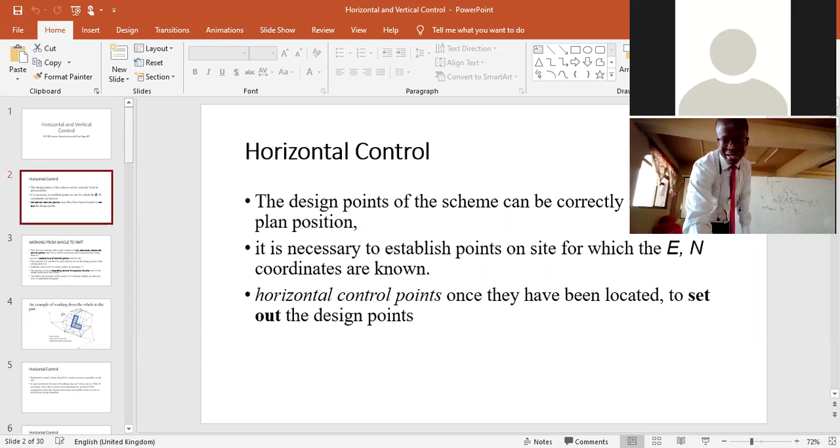So how do I go and set it out? I will need to first know that you need to turn this one, go a certain direction, measure a certain distance, and that is the point, this is where our first column is going to be. This is practically how it works. So it's very important to establish control points on the site, and then extend the control. Literally, if these are sites, we need to know these coordinates on the ground and set them out.

How do we set the coordinates out? It's like saying, find these coordinates. Find the coordinate for the corner of this structure. How do you do that? It's not trivial, so let's make the class interactive. How do you find the coordinates?

You're an engineer, right? Your design is being done on an existing scheme, like a plan. So you have a scheme on a plan, an existing plan. What do you need to find your coordinates? What do you need? So if I have these, I want to set it out.

I've explained to you that the project is sitting on the horizontal. I've never seen a building that looks like this before. But if you're being real, as you drive along and see the slope sides, you think, wow, if the building were like this, it would have been a bit easier, because now you have to step, isn't it?

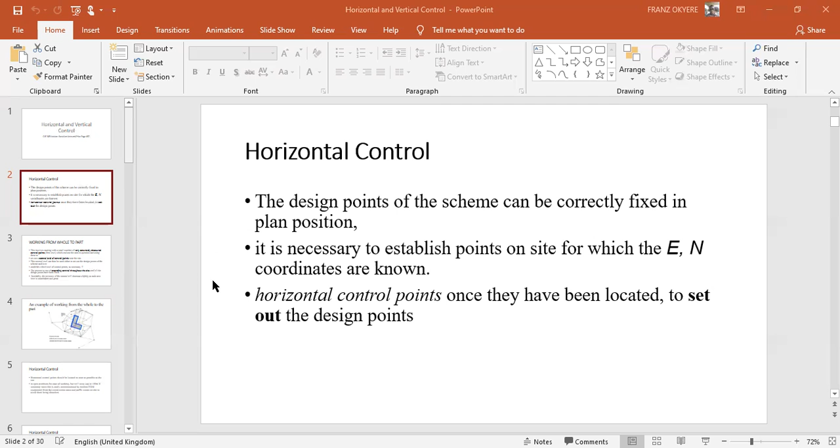Okay, so basically we need to have these controls. Okay? Yeah. So there can be a case that there is no benchmark. How do you go about it? That's what it is, there's no benchmark. Yes, there's no benchmark, then you have to get it there, isn't it?

Yes, but I know why he's asking that question. It's good to know the reason why someone is asking the question. He's asking the question, that's what he really wants to ask. Have we met? Okay, anyway. But I know what he's thinking. You know what he's thinking, don't you?

When there's no benchmark, literally you have to find a way to get the coordinates, otherwise you cannot work. So there's a cost of doing a traditional survey where you take a backsight to a known control and then turn and locate where the unknown value is supposed to be. Then you can say, break this building because it's sitting where my project is supposed to be. You get that? Traditional, you heard me? That's when there's a control, right? Now, Maxwell's telling me that there is no.

So that will bring us to our next topic. After talking about horizontal and vertical control, we are going to be talking about the global positioning system. It's a technology. Engineering is also about technology, about science and technology. Always remember the definition of engineering. And the day you graduate, someone will come and interview you and say, what is engineering? It's a serious story, is that okay? Always have that. Okay.

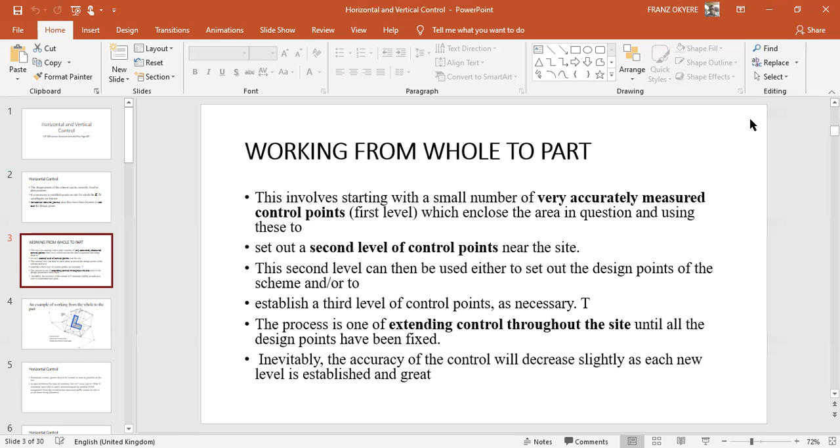Okay, so can we talk about the accuracy? Which one is more accurate, working whole to parts? That's just a question for anybody. Which one is more accurate, whole to parts? I don't even have to ask. Yes, for example, when you are doing setting out on site and you don't work from whole to parts, you start from parts to whole, afterward you see that your dimensions will be off.

Yes, having things going wild, I mean you'll be wondering, this one is spiritual, you have to worry about it. So you are right, you've experienced it.

Yes, so that's it. So the national, why do we need to use a national grid coordinate system? Why do we have to do it? Can we use a local grid?

Can we use a local grid? I don't know anything that stops us. We could, yeah, but what's the reason we're using national grid controls? So in Ghana, we have the one from the Survey and Mapping Division.

We have national coordinates. For now we have the Ghana UTM. Universal Transverse Mercator is a coordinate system. Transverse Mercator. So it's...

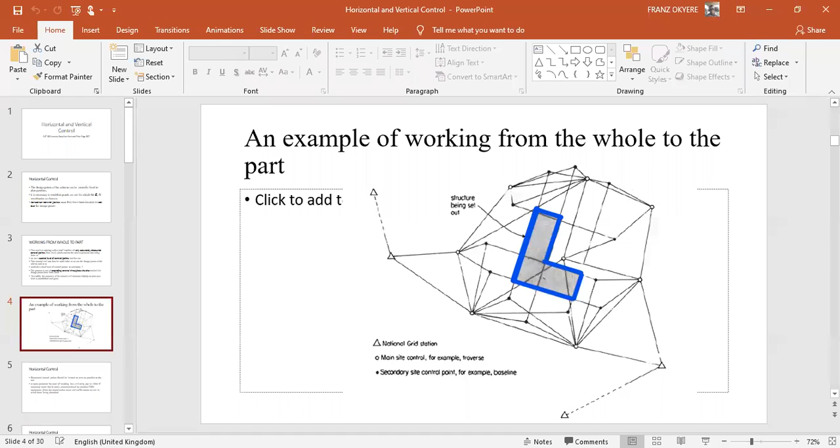Okay, so I think we really touch on this. Horizontal control points should be located as near as possible to the site. Why is that important? Why should horizontal control points be located as close to the site as possible?

Quick answer, anybody? Reference point. That's a reference, but the distance is to reduce for easy access. Okay, easy access is one of them. The other one is it's going to cost you a lot.

Yes, I was saying accuracy. For good accuracy, exactly, because the more you try to extend your control, you introduce human errors into it. Are you okay? So if I have to take a control all the way from the main road to this place, by the time I get here, I'm a bit off. The errors are compounded, they are cumulative in nature.

So as you come, it adds on a little bit of error. You turn, the surveyor gets a bit angry, you know. Are you with me? All right.

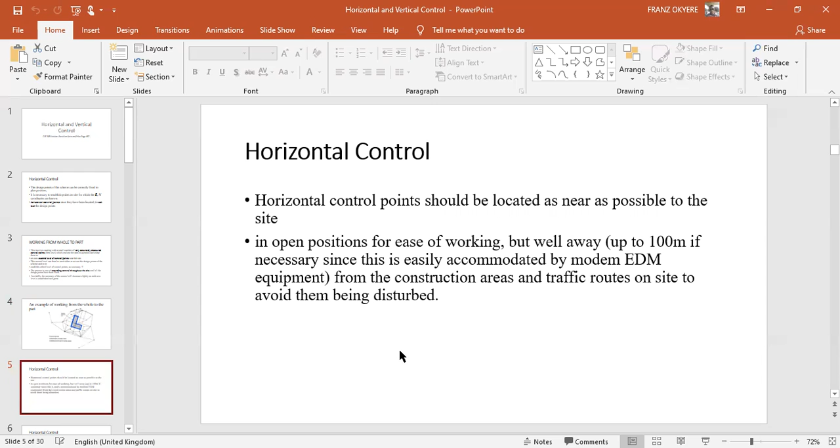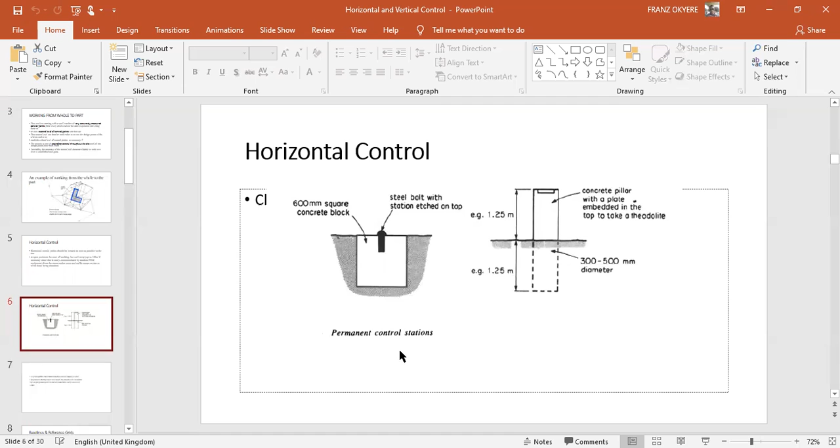So accuracy is very important, okay? Horizontal controls have to be fixed. When you talk about TBMs, benchmarks, you have to fix them. It has to be permanently fixed. So if it shakes or it moves, that's not going to help us, is it? You have to re-establish it. So it's very, very important to do that.

In some sites, I remember at Heathrow T5, there was a grid for the site, so every work you're doing can refer to a particular grid. A grid for the site is established so that a north direction for every element of the construction can be referred to. In that case, you have some sort of local coordinate system, is that not?

Okay, what about vertical control? I think enough of this one. Of course, primary, secondary, you get secondary from primary. So primary control, secondary control. Are you okay? Same concepts apply to vertical control.

How do you establish vertical control? What is a vertical control? This one doesn't need definitions. How, in your own words, what is vertical control? You know it already. The prerequisite is you need 100% knowledge in something before you're allowed to do something - vertical control.

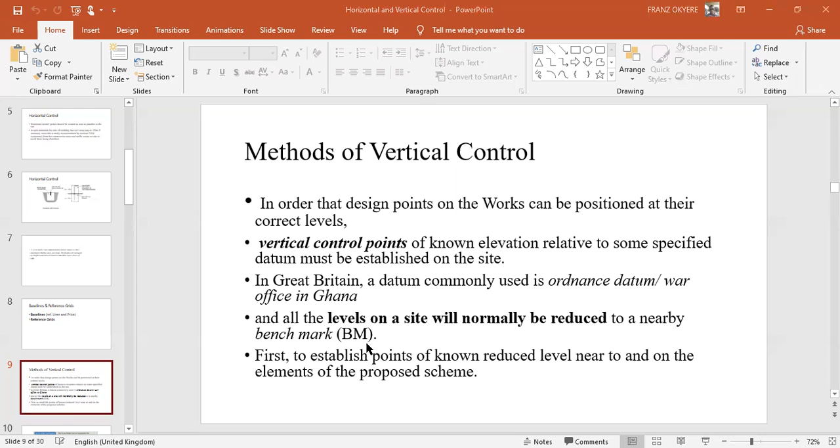Someone is saying something, oh your mic is just on. Do you want to say something? See Felix, when you are writing on the board, you can't see what I'm writing. Okay, the bottom part of the board, can you see it now? No. Can you see it now? I think no, please, the bottom part of the board. Once you see the bottom part, me too, I can't see the top part of my laptop. Okay, so you watch what you can see, okay, because I have to also assess my PowerPoint.

So you can't just have a control, okay, with a height value without any XY coordinates. Okay? Yeah.

Is that true? Let's say you know the Z but you don't know this one. It is just not possible. Why? Why is it not possible to have just a Z without XY? It gives you where it is. Yes, it's the place where this is where you are, and this is your value.

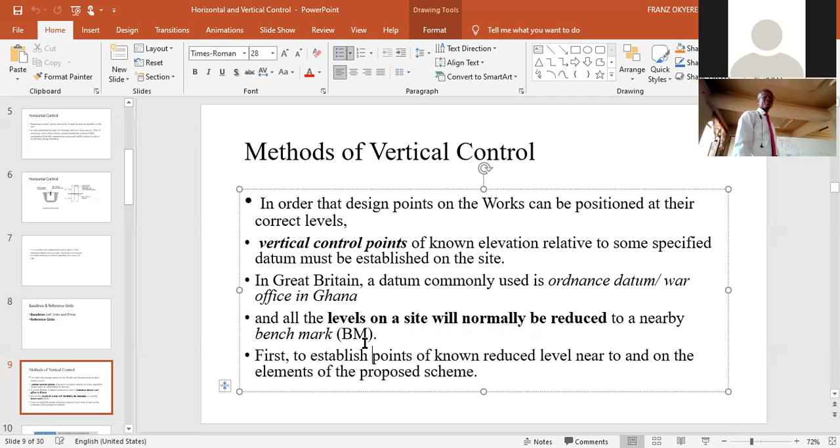Are you okay? But you can just have the XY without the Z. So in that case, you just don't know how high it is, but at least you know where it is. So it seems we start with the XY. So when you apply for the points, yes, you have the X and you usually have all that. And when you start the project itself, implementing it, yeah exactly. And so literally you mark the points on the plan. The heights are now imposed on it. Are you okay? As if it's an attribute of the locations.

In 10 minutes, fellas, please try and join me again, okay? What you see on the board is what we are talking about. So I think for you, you are even ahead of them, you can see everything. How do you determine the height? What's the process called, Jonah?

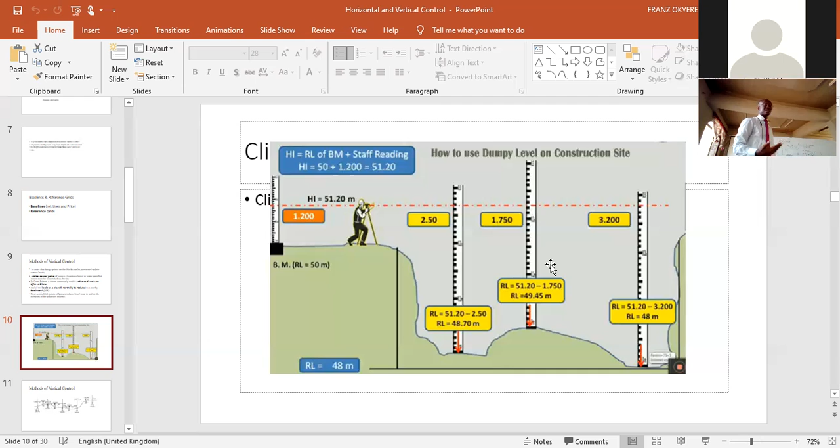Are you okay? So if you're on a site, you can just use this and look relevant on the site. Are you okay? Or talk to people, and they will think, okay, he knows what he's doing. I say, okay, what's the HI? Come on, let's do this. Let's go, it's okay, just this basic idea. All right, okay, so basically that is the way it is.

Should we work from whole to parts for leveling? Should we? We should, shouldn't we? We should, yes. The same applies, all right.

How would you fix a TBM that has a vertical value? How would you fix it? If you have a temporary benchmark, okay, the benchmark has a control, right? It's a permanent feature that has coordinates. How would you establish it? What would be the consideration? Now I'm talking about physically, how do you put it down and say this is a vertical control? How would you do it?

Oh, because it's vertical, you get it. And obviously it will be good to just get it permanently fixed in such a way that you won't have a change in the height. You get what I'm saying? So if you're going to be planting, say, a pillar in a soil which is not that stable, it's going to sink by 0.1 or 2, which is the reason why you got fired. Okay, do you get what I'm saying? So that 0.1 now, it's enough for something not to fit in the structure, in your structure, whatever you're setting.

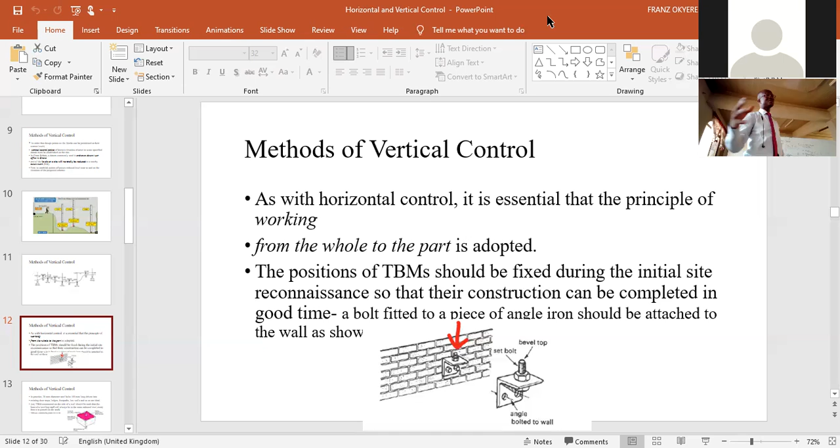Okay, you also make sure that you level the instrument, you get it? So that's why we call it orthometric. Ortho means what? 90, orthogonal. Or anytime you hear that, even in AutoCAD, ortho means exactly, and they are under the influence of gravity. So later on, that should also be there, but that's beyond the scope.

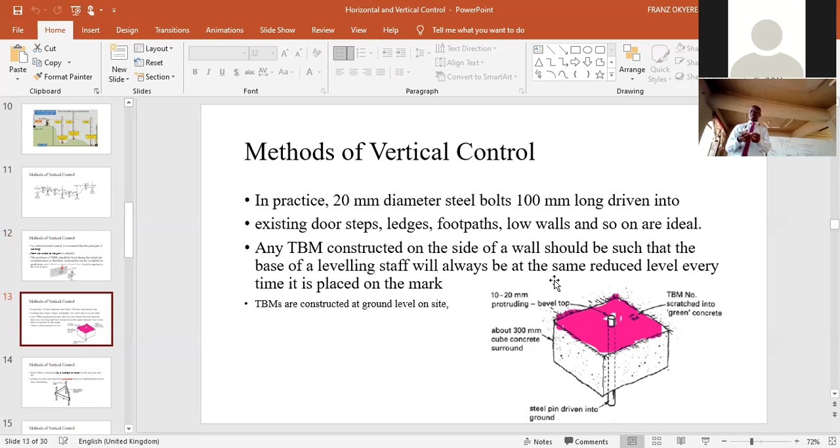It's okay, all right, so let's look at how this is. Obviously you can make use of bolts, anything that works. I saw it's like a metal that's been driven into. Have you seen these primary schools?